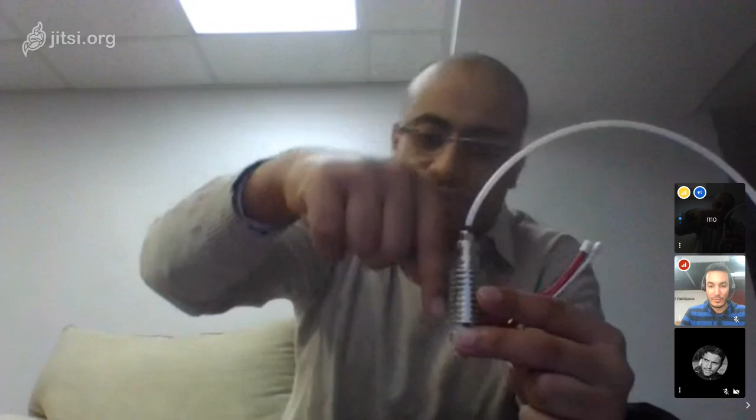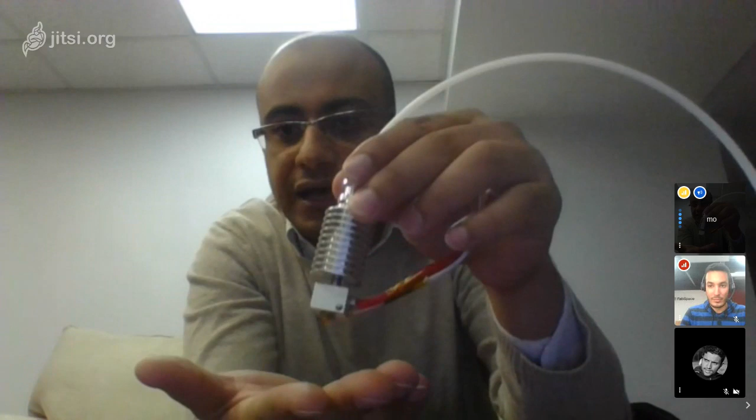So if you guys can see, this is a nozzle. You're literally taking the plastic, usually PLA, polylactic acid, or ABS, melting it, and extruding it out of a nozzle. It starts layer by layer at the lowest level, moves and deposits one layer, then moves up, deposits a second layer, and so on and so forth, until it builds a full model upwards.

This method is called FDM, and there are other methods as well. There's something called SLA, stereolithography. In this kind of 3D printing, there is a pool of photocurable resin, which is like glue that hardens when you shine high intensity light on it. There is a platform that dips inside this pool of photocurable goo, which is kind of in a glass or clear plastic container, and underneath there is a laser.

So the first layer, the platform dips inside, the laser shoots up light and hardens the photocurable resin to the first layer, moves up, shoots another set of light, and hardens the next layer, and so on. So what's happening here is layering. The process takes a 3D model, creates layers out of it, and informs the printer how to deposit that layer over time and over a certain area.

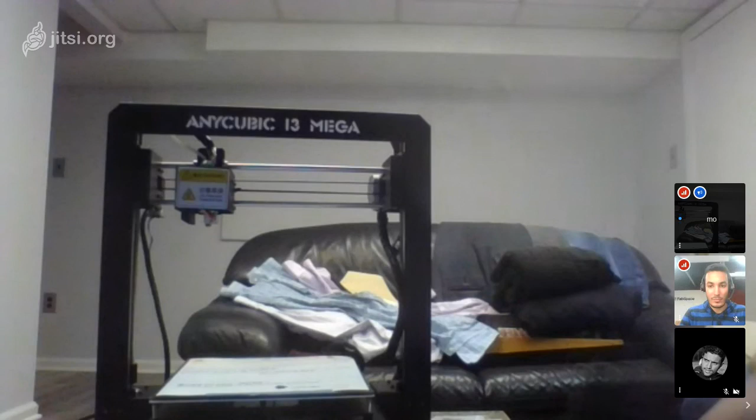There are many 3D printer companies out there, and the most widely used consumer printers in the world are Prusas, called the Prusa MK2 or MK3 — I think they're up to MK3 right now — and Ultimaker. The first commercially available consumer 3D printer in the world was something called MakerBot, and MakerBot was later replaced as number one by Ultimaker. I'll go over the reasons why MakerBot was supplanted by Ultimaker soon.

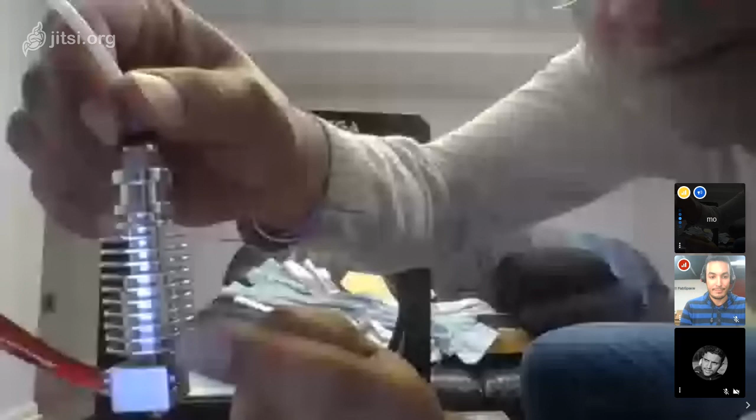So let's talk about the different parts of the printer. I showed you earlier the nozzle, and this is the heating element — this area is where the plastic starts to melt. And then at the bottom, this area right here is the nozzle. This nozzle comes in different diameters; right now I believe this is a 0.4.

It's a 0.4 millimeter diameter, and I believe this is also another 0.4 millimeter diameter. This area is all responsible for heating the plastic and depositing it. Now there's another part of the head called the extruder.

The extruder is basically a motor that pushes the filament, which is the plastic that's used. This is a roll of filament, just plastic molded into a thin thread. That filament goes and is pushed through this tube, called a Bowden tube.

It's pushed through this tube, and when it's pushed all the way through and into the head, that's basically what's happening. In order to push it through, we need a motor to drive this filament, and that motor exists back here. So let's turn this printer around.

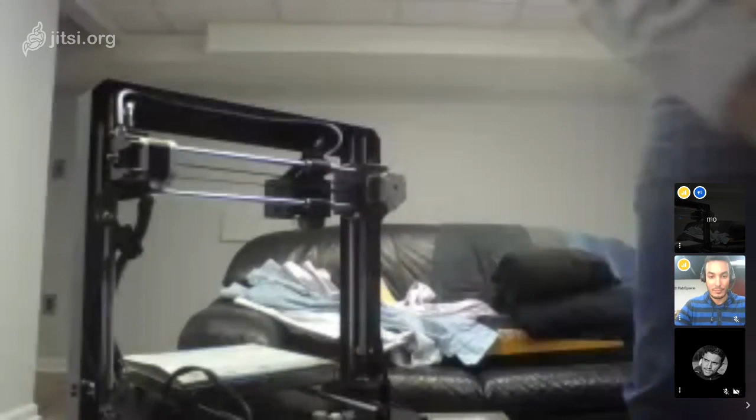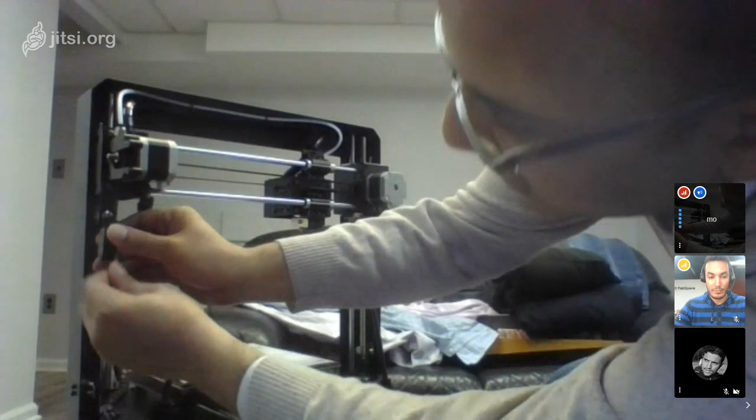So when we're loading the filament, we load it into here, and it comes out and grips it - that motor grips it. I don't know if you guys can see this, but there's a little gripper that the motor is held onto. It pushes the filament through and into the Bowden.

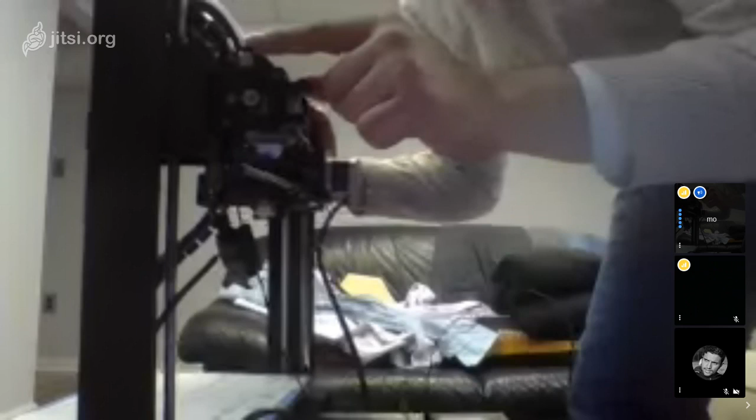So again, this is the motor right here, and the gripper is right there. You see that wheel, and it's pushing the plastic through into the Bowden tube, and that comes out over here. The Bowden tube continues in the front, and the nozzle is right underneath. So that's how the head mechanism works.

This extruder that's in the back can be one of two different types: there's back-driven printers and front-driven printers. The back-driven printers are the ones that have extruders behind them, in the back of the machine, depending on the tension in the Bowden tube to push the material through and into the heating element and nozzle.

So it literally pushes the material through, and if this Bowden tube didn't exist, it would just push material out everywhere. You have to have this Bowden tube as a guide in order to have the material enter the nozzle.

Now there are also front-driven systems, like the Prusa model that I talked about, meaning that motor that's in the back is actually right above the nozzle - right above the heating element - and it drives the material into the nozzle right away.

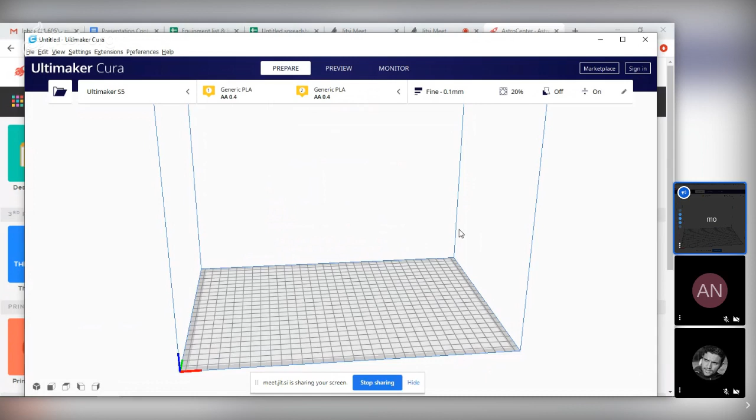Up here, you can change what material you're using. The two main print materials for FDM printing are PLA and ABS. You could also choose the material and who makes it. All these minor things matter - there's material that's better quality than others, and that depends on the cost you're willing to spend.

Also the nozzle diameter, which they call the print core. We have a 0.4, and this goes up to 0.8 for this specific printer. You notice here there's AA and BB, and that's because the Ultimaker S5 that we chose is a dual nozzle printer. It has two nozzles that you can feed material to, and that gives you two abilities.

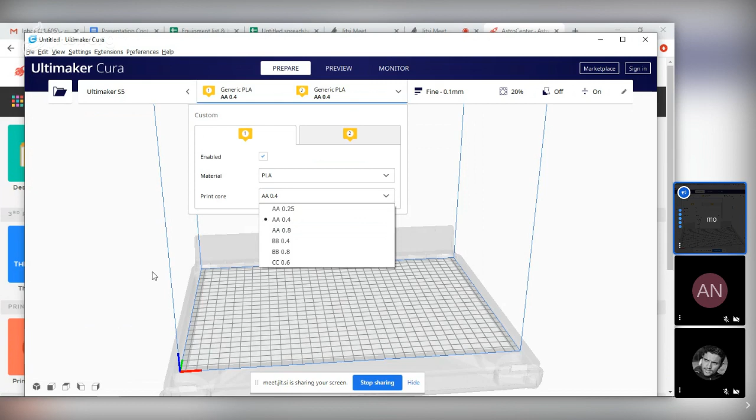The first ability is you can use a model material like ABS or PLA in one nozzle, and something called a support material - I believe it's PVA - in the other. This lets you create objects like this gear all in one print. You lay down a model material, and in the gaps and underneath any overhangs, you put a support material, which you're able to melt out in water or some abrasive liquid afterwards.

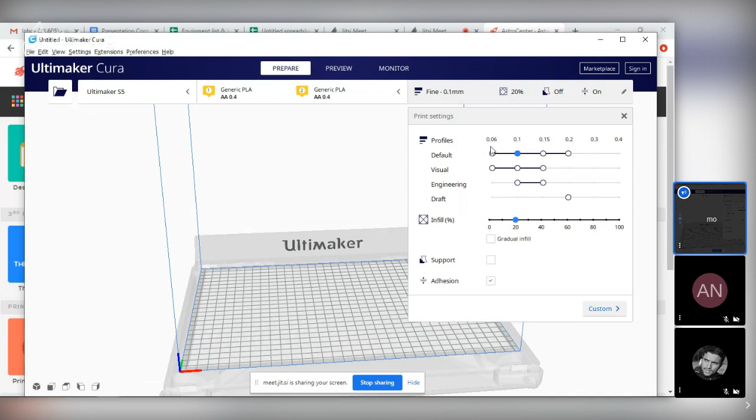Then you're able to choose your printing profiles. Here, this is the layer height, and you can go into custom settings - this is great because the first one is quality. Remember how I showed you the different layers on the gear earlier? The layer height really determines the quality of your project, because the thinner the layer height, the more accurately it displays the surface of your model.

The thicker the layer height, it's kind of like a pyramid - you've seen the step pyramid of Egypt, that's approximating a layer. Then you have the three main pyramids in Giza, which still have layers, but they're much thinner in layer height. So you're approximating the surface using the layer height - the thinner the layer, the cleaner the surface, the closer the approximation.

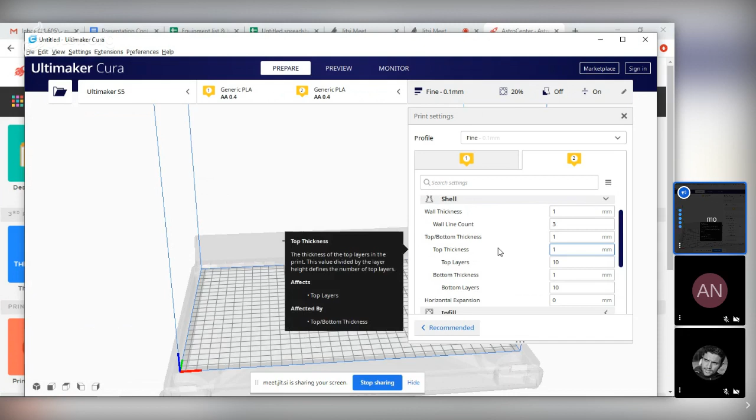Then you have something called shell. The shell includes things like wall thickness, the top and bottom thickness, and the wall line count. Let me stop sharing here and show you what I mean by that.

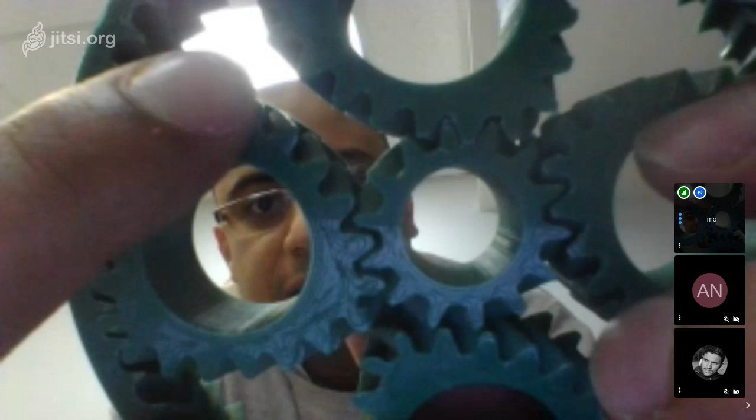If you guys can see, there is a little wall it builds around the material, and before it lays what we call the infill inside of the material.

So it lays down the walls around, and after it lays down the walls, it starts to lay the fill on the inside. Hopefully in our next session, I'll show you the material while it's being laid down. I will share my screen again.

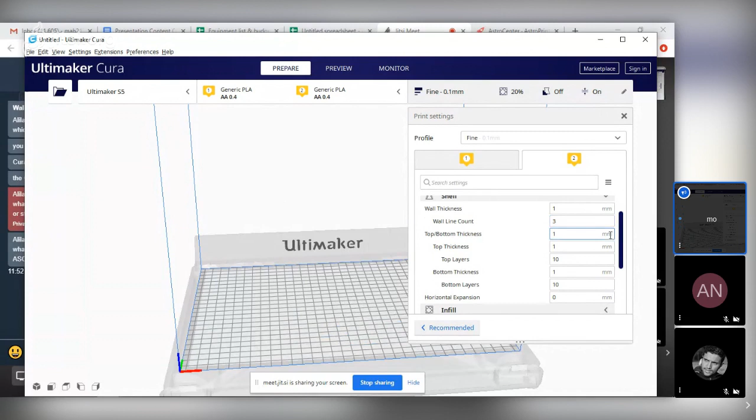All right, so that's what wall thickness is, and that's what top and bottom layer height is - it's in millimeters. The wall line count is how many times it goes around and creates walls before it starts to put in the fill in the center. Top and bottom thickness is the same thing - how thick you want the top and bottom, and how many layers it puts on before it starts to get into infill.

And what is infill? Infill, which is the next thing that we set, is the material on the interior of your model. So it's done putting the outside extents of your model, done putting the wall, done putting the bottom layer, and now it's filling the inside, and that's what infill is.

The different parameters you're changing are the density - how dense do you want it to be - and the pattern, which creates the shape. It could be a triangle, and as you can see, there's many different types of patterns.

I usually use the grid pattern. Grid is basically a hashtag pattern on the inside of the material. And how thick do you want that hashtag? Do you want me to fill the interior completely using a hashtag pattern?

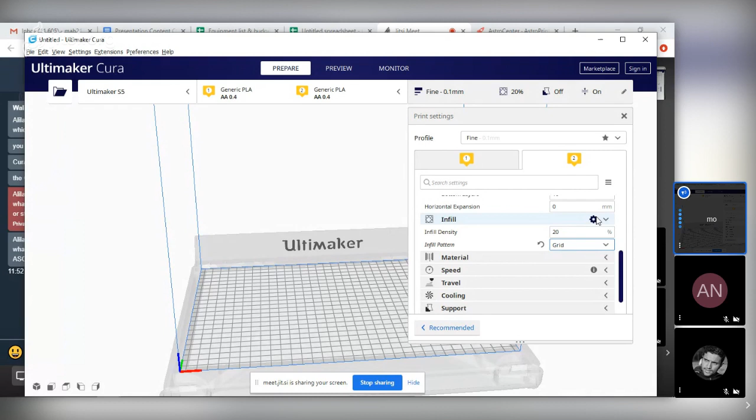Or do you want me to only fill 20% of the interior, or whatever percentage? That's all dependent on how much stress your part is going to be feeling. If you have a project where it's a doorknob or an axle on a motor, something that's going to see some amount of stress, you obviously want that infill to be higher, so that your part is stronger.

If you have a model like, I don't know, you're printing a Pokemon, for example, and it's just going to be a model that you put on your desk, then that doesn't need a greater infill. That just needs enough infill to keep that model from collapsing in on itself when you hold it. So you want a lower infill density.

So a general guideline for a model that is visual, like a statue, you want something between 15 and 25% infill. For something that's going to see some kind of force upon it, then you go above 50% infill to make sure that model doesn't break apart when it's seeing that force.

The next thing that is usually changed is the material temperature. That's usually set once you select what kind of material you're using - it has a library that sets it. Now this temperature actually varies, and it varies by color, and it varies by the manufacturer of that material.

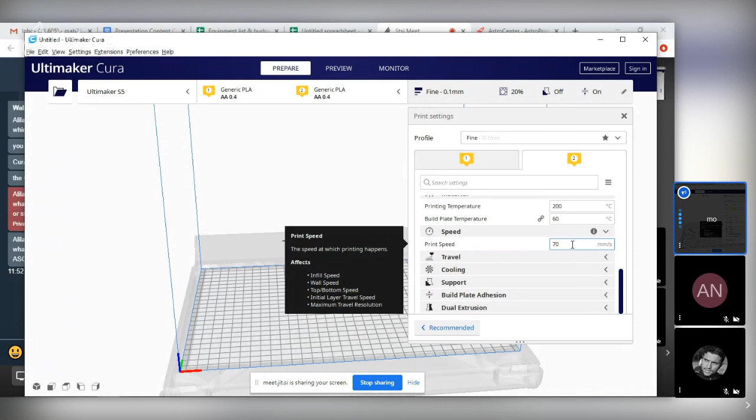Travel speed is different - if your system is well damped, meaning there's no vibration that's going to affect your print, then you can increase the travel speed as well.

There's two final things I want to discuss before closing this up: support material and build plate adhesion. Support material is laid down underneath any model material. So when you have an overhang - imagine a model with a piece, like an arm, sticking out over empty space - underneath that empty space, since you're making things layer by layer, you have to put down support material to make sure that arm doesn't fall apart or fall down.

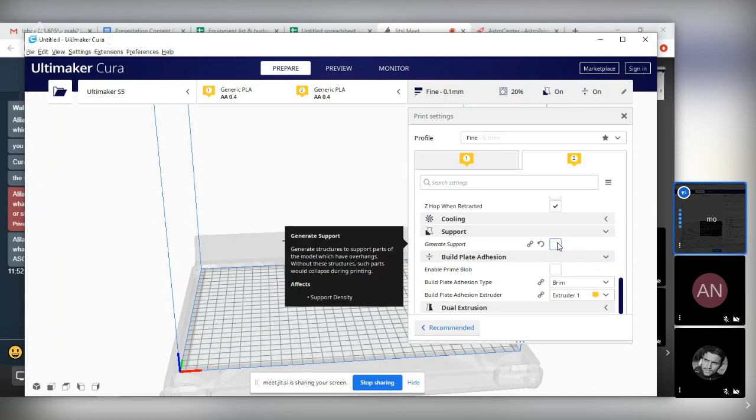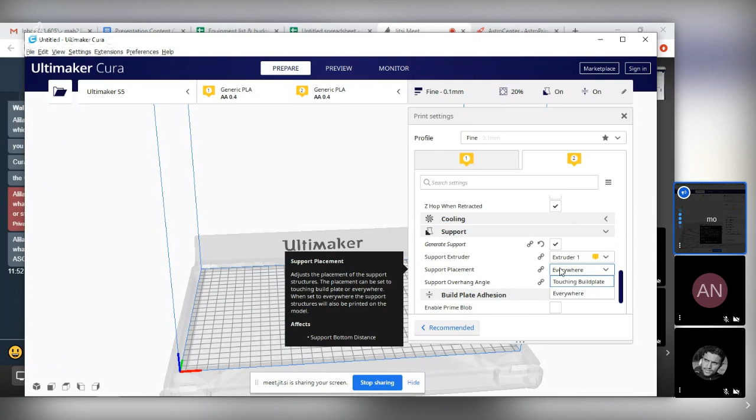When I select that I want support material laid down, it asks me from what extruder, since this printer has two extruders, and whether I want it just touching the build plate or everywhere. That arm could be over the build area, or over another part of the model. If I select touching build plate, it only produces support material between the build plate and underneath that arm. If I say everywhere, it puts support material anywhere there's an overhang, even between model material and other model material, or between the build plate and the model material.

That's the idea behind support material. There's two different types. If it's a single extruder, not a double extruder, it just creates less dense material as support material underneath the model area. It's the same as the model material - it's PLA, but less dense - so it's easier for you to break it out and clean up that surface.

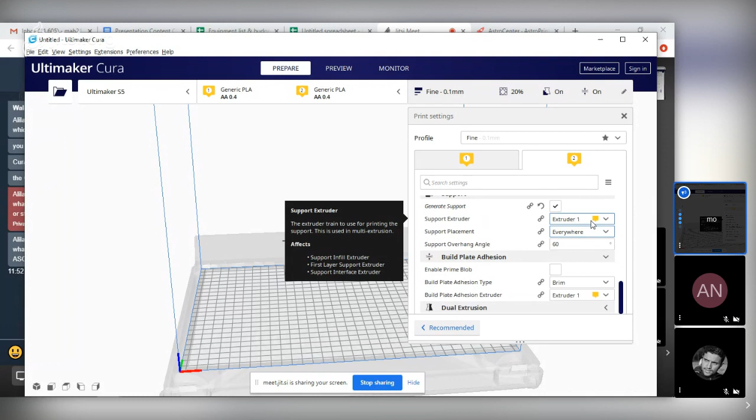If you have a double extruder, you could use something called PVA, which extrudes from your second extruder, and when you're done, you just drop it in water and it melts away. What's good about that is it gives you a much cleaner surface because you're not cutting away at your model material and having to sand and do a lot of post processing. What's bad about PVA is it's often very finicky, and your PVA extruder fails often, because when your PVA hardens, it blackens and creates clogs in your nozzle.

So I actually don't enjoy dual extruders. I don't think they're efficient enough, and I don't like the technology. In my experience using them, it failed once every 3 times. There are different PVA types that are more expensive that don't fail as often, but you have to be willing to spend the money on it.

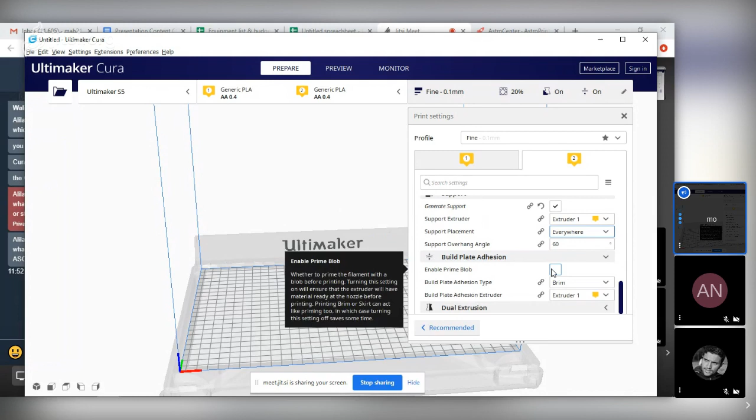Finally, build plate adhesion. This is a material that is built around the base of your model. It's built around the base of the model, and there are 3 different types.

There is brim, as you saw inside of Cura, there is a raft, and there is skirt. The skirt is basically just a line of material that it creates around, not even touching your model. When you start your print, it creates that skirt, then goes and starts creating the base, the bottom layer of your model, and goes on from there. Brim actually creates kind of like a hula hoop around your part itself.

It creates a border area of extra material around your part, and that's there so it can hold the material to the build plate. So you don't have a situation where part of your print starts coming off the build plate, and then your print gets all messed up.

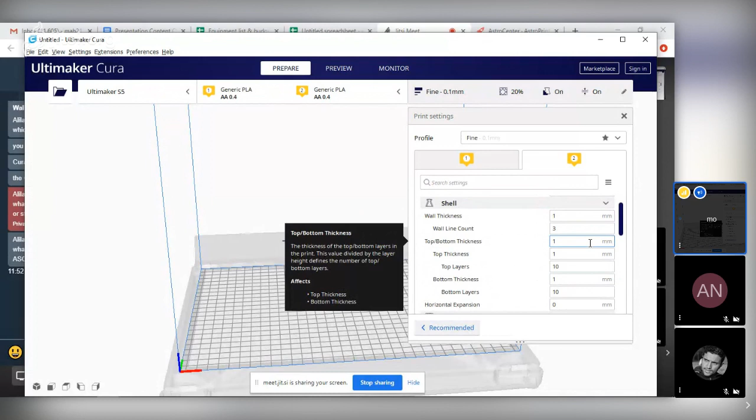You adjust your infill depending on whether this model is going to take some kind of pressure, or if it's just a visual model you're putting on your desk to enjoy. And you adjust the support material depending on whether there are overhangs on your model, or if it's more like a box with no overhang, meaning you don't need support.

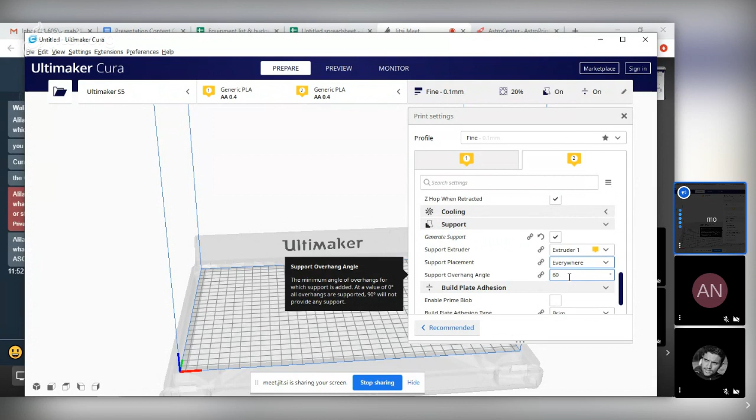And finally, you adjust your build plate adhesion, whether you want skirt, brim, or raft - sorry, stage or raft, there are two different ways of saying it. So raft is what a stage is, and that's basically it.

From there, you prepare your model and it automatically generates your G-code. You save that onto an SD card, import the SD card into the printer, press print, and you're ready to go.

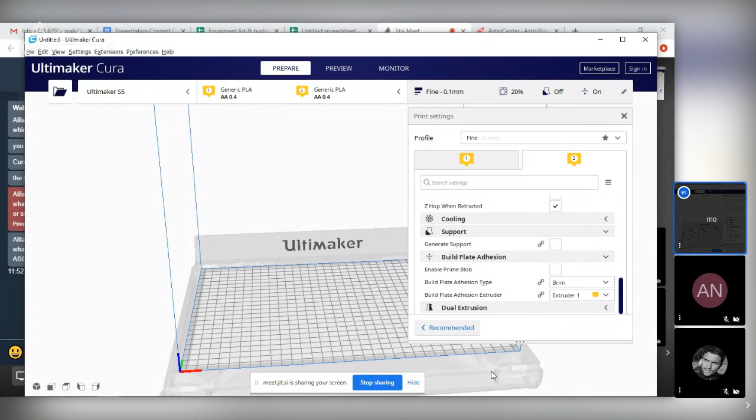I hope that we can have a secondary time to meet up, and I'll have a printer running at that point. We can go through the process and have a model there, and we'll be slicing the model during the course.